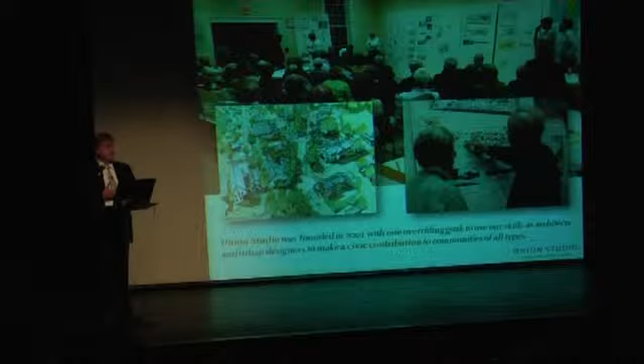Part of my frustration as an architect is that as communities, we've lost civic engagement, and I believe that architecture and the places we make are the venue for the civic engagement. So to the extent that we're able to come into communities and design places that put a premium on the community building aspects of the public spaces you build, that's the kind of project we're interested in.

And Newburyport's Waterfront, one of the things that's so remarkable is how committed everybody has been. I mean, it's been 40 years of vigorous debate on what's going to happen with the waterfront. And that suggests to me that people care deeply on both sides. And that's the kind of environment that we enter at our peril.

And I've said this before, it's a sort of terrifying thing to sit in front of this group, because I know you are not casual observers who just didn't have anything else to do on Saturday morning. You care deeply one way or the other, and into the breach I step.

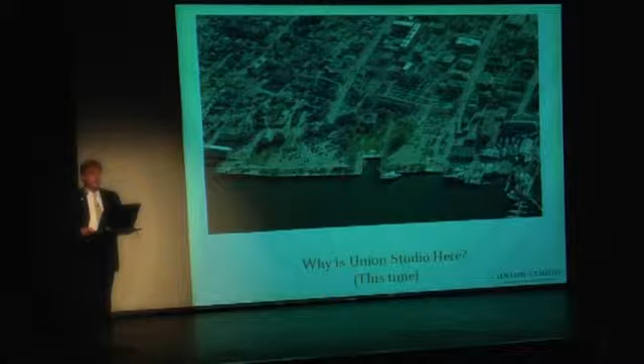So why are we here, and why are we here again this time? We're here because the conversation has evolved. A lot of the conversation that happened a year ago and then 9 months ago still is valid, but this time there has been additional information which is brought into the conversation, and we, in good faith, are trying to incorporate that. Many of the comments that have been brought forth have been valid, and the revised plan, I think, reflects a good faith attempt to incorporate that.

But I want to go back through the original goals. We were here to explore the possibilities of enhancing the city's waterfront, of making the park a better place. And we continue to be here to do that. But it was also our charge to explore the possibilities of connecting that park more fully to the city to create a better use of the park and the waterfront for all the citizens of Newburyport.

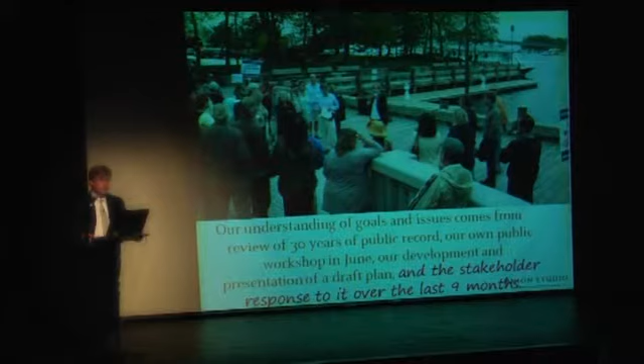Our understandings of the goals and issues have come from our review of the 30 years of public record, which I just reviewed again last night, the whole chronology, all of the arguments for and against a developed waterfront. Our own public workshop in June, where we presented some of our initial thinking, and then we walked down to the waterfront and heard more directly and emotionally the issues that people are concerned of.

Our really intense thinking and the development plan that we presented in September, and the stakeholder response to that's come to us over the last 9 months, which has been considerable, both in terms of letters to the editor, to the Daily News, communications that have been relayed to us. Several individuals who may be in the audience have forwarded information to us that we were not privy to before, so all of that's been incorporated.

The goals that we work under remain the same. Enlarge the park, the civic space, while preserving an appropriate amount of improved parking. And this is important, the improved parking. Right now the parking is ad hoc on a gravel lot, and even the experience of parking is something that should be improved. It's not just a matter of the number of parking spaces, it's the matter of the configuration of those, and whether the experience of parking at the waterfront also adds to the experience of experiencing the park.

We want to improve and enrich the experience of the park without commercializing it. We heard that loud and clear. Even the folks that support development on the waterfront of some sort are not in favor of commercializing it to the extent, and I'll show examples of the sort of antithesis, or the example of commercializing the waterfront. And it's been clear to us from the beginning that nobody wants to lose the bucolic or the park-like setting at the waterfront.

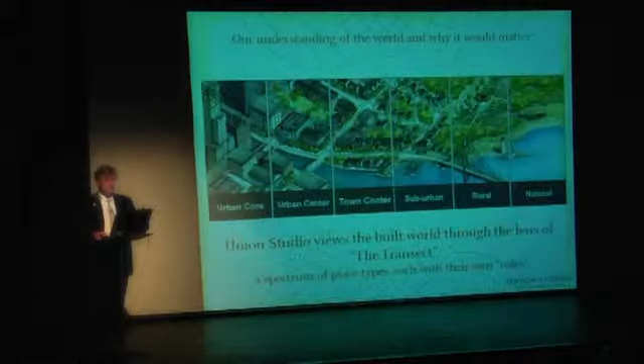That issue of self-funding and sustainable has been a subject of debate. I know that folks have questioned the assumptions of how much it will cost. We have more information about that now, which we can share later in detail. But the point in any scenario, whether you quibble over the exact number, is that the thing needs to be sustainable in several different categories, one of which is financial.

So in the original presentation, I talked about Union Studio's understanding of the world from the eyes of an architect and an urban designer, and I want to walk through that again. We understand the world to be kind of organized. This is an artificial spectrum, but it says that the world is organized as a series of place types, from the most natural to the most urban.

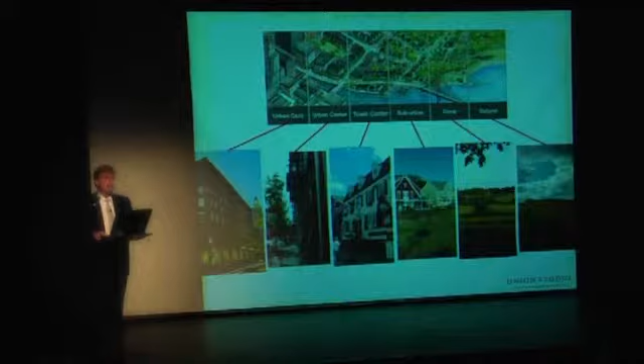And if you look at the world through that lens, you can start to understand what things should be in certain components. So Newburyport in particular, you see we've listed the natural, the rural, the suburban, the town center, and the urban core, and think of that from being the dunes on Cape Cod all the way to the center of New York City. And it's not just regional like that; any given town itself has this spectrum of place types.

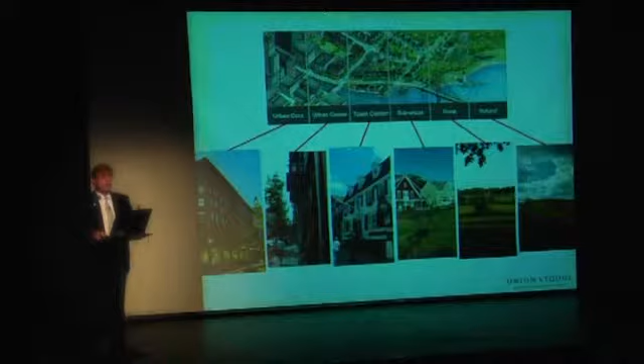Newburyport's downtown is what I call the town center, and I want to take a minute to make a digression which I made before, which is the town center kind of place is America's unique contribution to urbanism. It's that place where the built world and the natural world exist in a rare balance that doesn't happen almost anywhere else in the world. You've got a nice, loose fit of buildings which are in themselves objects standing alone with separations between one building and the other, knit through with parkland.

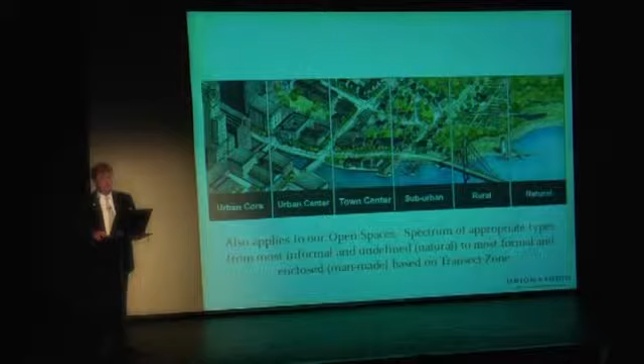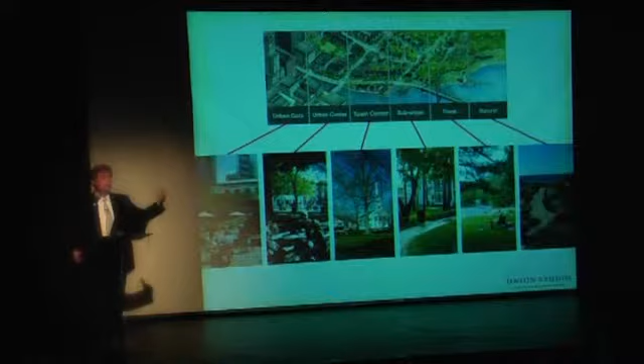The other way to look at it is from the landscape side of the view and think of it in terms of open spaces. And Newburyport also exists along a spectrum of open spaces. In this view, if you look at everything from the dunes on Cape Cod to Post Office Square in downtown Boston, you have this range of completely natural and untouched by human hands to completely artificial, but still an open space in the downtown of a city.

Well, Newburyport, again, occupies that middle ground, that perfect balance that we all understand as small town America. It's the town green with the steeple and the courthouse fronting on it. It's a loose collection, enough to create a strong place where you know you're in the middle of town, but it also is leavened and made softer by the green spaces that are around it.

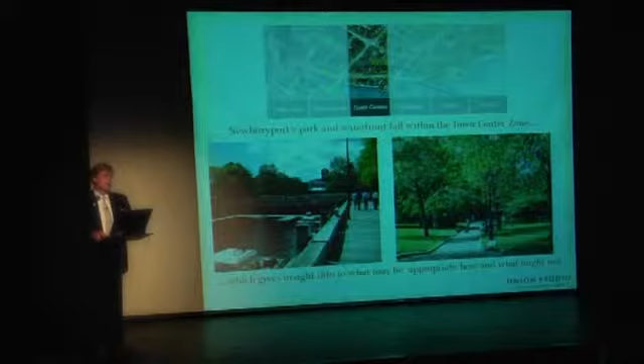So the reason I emphasize that view is because if you understand the world architecturally and from a placemaking lens, it gives you a way to judge what any given place should be if you're thinking about changing it or making it fresh. And so it's always been insight for us on what the appropriate nature or balance between the building and the landscape is in Newburyport, particularly at Market Landing Park.

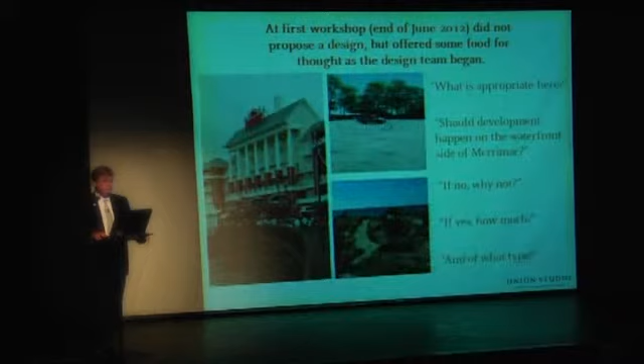So by that, we know automatically, if we understand the place we're working in, that we're not talking about the image on the left. Nobody in Newburyport ever wanted to commercialize the waterfront in a sort of honky-tonk way like the Disney Boardwalk or Atlantic City. But likewise, I ask you, is it appropriate that the waterfront, the key asset, remain a gravel parking lot in large measure?

It's not that, nor is it a series of dunes. It's something in between. So the questions we were asking ourselves is, what is appropriate here? Should development happen at all on the waterfront side of Merrimac? If no, why not? If yes, how much and of what type?

So we went back and looked at what the historical record of the waterfront in Newburyport was, and I know this is all old news to many of you, especially because you've sat through this presentation once before. But it's helpful to understand that it was not always open space. It wasn't anything like open space. But this vibrant waterfront, which was a mix of commercial and restaurant and tavern uses,

at the end of the 19th century and into the 20th century had become by 1960 this, a waterfront which still had some commercial activity, but it had largely become blighted, it had been cut off. All of the things that we're arguing for now, which is an attachment, a connection to the waterfront, had been lost. And the waterfront was cut off, it was ugly, and it was not even economically prosperous.

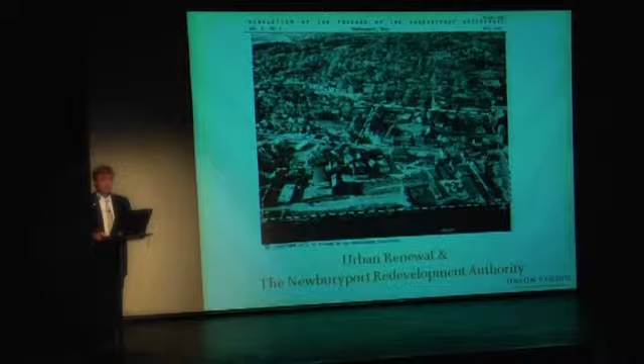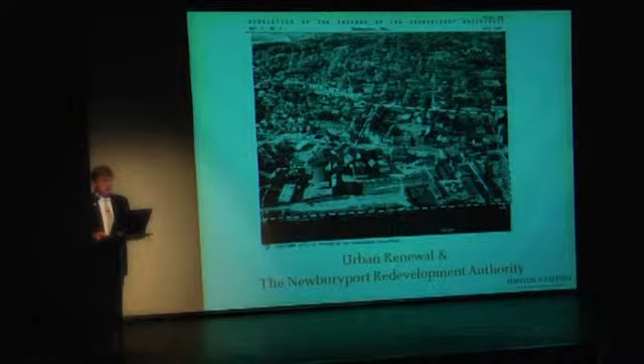So in comes urban renewal, which in my circles gets a bad rap. It's not responsible for a lot of great changes to cities, but in this case, what it did was create a blank slate. So urban renewal in 1968 took a waterfront which was populated roughly at this level and cleared it out to a waterfront which is populated mostly at this level. And what has replaced it is largely parking lots and Market Landing Park, which was built in 1984, I believe is the date that park was designed.

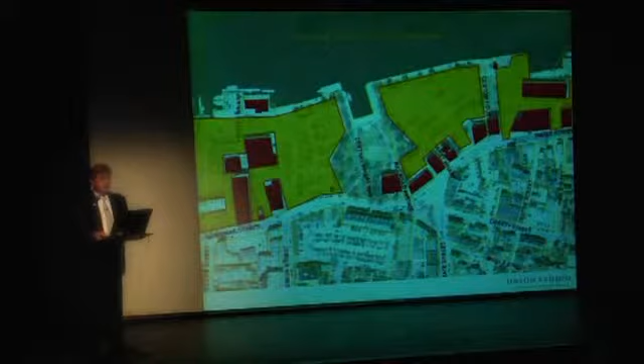I'm going to do an analysis of Market Landing Park and why this is such a special place, why I believe it works as a space right now, and suggest ways that could be made better. But because of urban renewal, Newburyport's use of the waterfront is much different from the prevailing patterns of New England waterfronts to the north and south of us.

Typically, you find in waterfronts that segued from a heavily commercial activity to a present day, this mix of residential and entertainment and restaurant uses that infills along with marinas and some light industry. This is not to suggest that this is what the waterfront at Newburyport should be, only to say that you have a rare opportunity, which you all know. That's what we've been focused on for the last 40 years. So this is the typical pattern.

I'm not even quite sure where all these images are, but this attitude of getting economic activity, primarily from a recreational point of view, out to the water's edge has been the effort of most cities that are trying to capitalize on their waterfront. They recognize the economic value of that waterfront, and since it's already developed, they're converting that development into a different sort, which is primarily recreational.

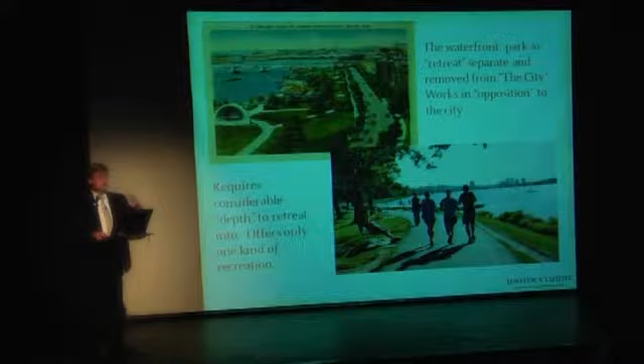The other way, which happens more as an exception to the rule than the rule, is the viewing of the waterfront as something different altogether from the city itself. And I would dare say this is how the folks from the Citizens for Open Waterfront prefer to think of Newburyport's waterfront, as a retreat, separate from the city and a place of repose or escape from the city. The image on the upper left is the Esplanade off of Storrow Drive. The Charles River's to the left, Storrow Drive is to the right.

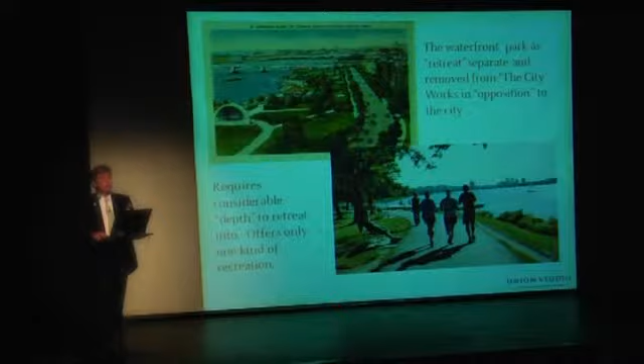The problem in this scenario is that attitude with respect to the waterfront requires more space, physical depth, than we have present at the moment. And actually Storrow Drive in this case is acting as the barrier, which makes it, once you get over into the Esplanade, you're in another world. It's about the waterfront, it's about moving along the edge, you've got a screen of trees, and the city has been left behind. But it requires considerable depth and considerable length for that to happen.

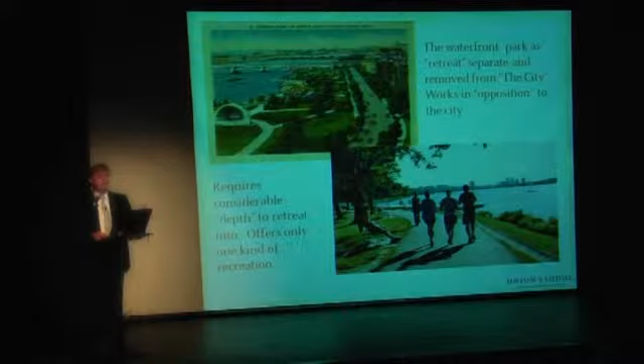An inversion of that would be like Central Park in New York City, where it's so big that you can lose yourself in it and forget about the city altogether. That's another way of thinking of open space, and it's the way we typically, as Americans, tend to think about open space. It is something completely other.

There's development over here, and there's open space over there. But that has not been the historical pattern for most of America's urban design. It's always been kind of a balance, more of the town green sort of open space than the Central Park sort of open space. So for Newburyport, this is both a unique opportunity and a challenge to provide a place of retreat, but also a connection to the city.

So the way the park is currently working is, to us as sort of wonky architects and urban designers, very interesting. We sort of analyzed it to understand what was the best way you would intervene to make more of the good stuff and take away the bad stuff. It acts as both a meander in terms of the water's edge and a gathering place, but it doesn't do any of those as well as it possibly could.

Obviously, I said before in the first presentation, well, there are problems with Market Landing Park, and people just jumped on me and said, there is nothing. We love this park. So obviously, I retract that, and I concede that everybody loves Market Landing Park and the boardwalk out at the water's edge. But there are opportunities, I believe, as an urban designer, as someone who's honestly trying to balance all the concerns of your community, there are opportunities to make it more of the stuff you enjoy.

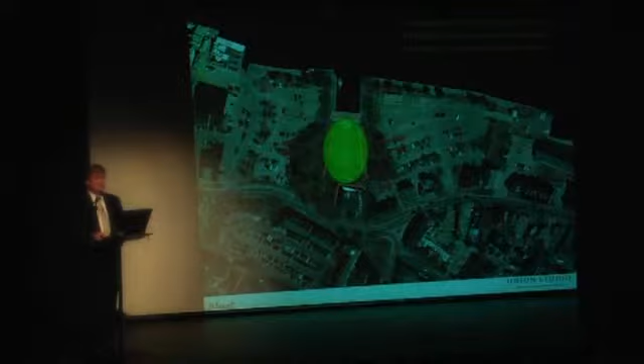When you sit in the middle of Market Landing Park, you feel like you are removed from the hustle and bustle, from the traffic. It's a great place to have a picnic. But it's working in spite of things that landscape architects and architects would consider its lack of closure, to use jargon. So that central focalized gathering space, its landscape buffer is diffuse and it's too thin to really enclose the space.

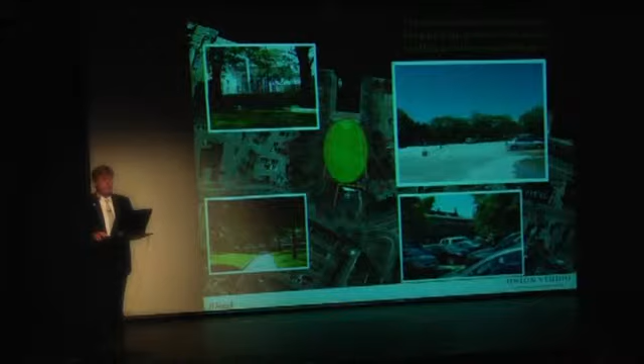So the experience at the edges, if you're doing anything other than looking out at the boat basin, you're looking left or right, you're looking through the trees at parking or at the backs of buildings, and so you have this view of the parking right here, another view of the parking to the east, and especially in the winter when the leaves are off the trees, that view is even stronger.

But it's also working as a centralized gathering space. All of the lines, the architectural lines, the enclosure of the tree lines, the stage itself provides a setting where this is where you go if you're going to have wedding photos taken or if you're going to have a small concert on the waterfront. Everybody wants to be in this space. So is there anything you could do to make it work better, or should you just leave it alone, don't touch it? But the way it works currently suggests how it might be improved.

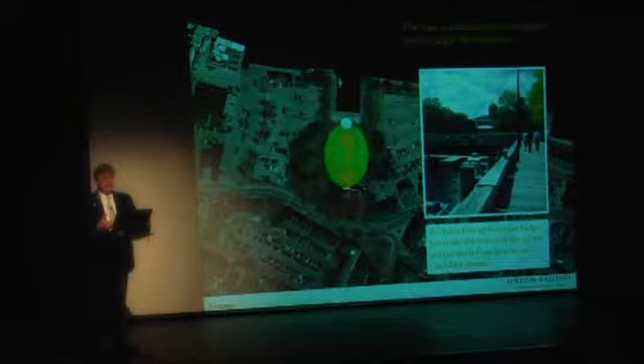And I said last time that the one building that does have a presence on Market Landing Park is this building that we're in right now, and its cafe, which fronts on the water. This image on the right suggests what I mean there, in that the tower and the porch of the Firehouse Cafe tends to create a closure that lets you know as you've entered Market Landing Park that you've entered a space. And having the two bookends of the stage and the cafe help to create this sense.

It's certainly not diminishing the experience of Market Landing Park, and we would argue that it's the one instance where you have this in-between, or this hinge between the architecture and the landscape, which actually, to all reports, I haven't heard anyone say that is not a successful arrangement.

The edge space, the circulation in the boardwalk, has another character altogether. And you can see that people love this. When you walk out into Market Landing Park, you're going to move out to the water's edge, you're going to move along it. It's interesting, however, that you're not always moving along the edge.

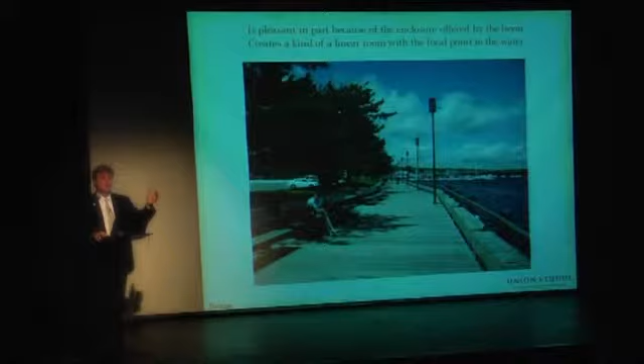People like to sit at the edge, and part of the reason they want to sit at the edge there is because of the closure that the trees at the background and the berm create. And that helps to create this sort of room. It's an outdoor room is another piece of jargon that architects use, but there's the focal point of the water,

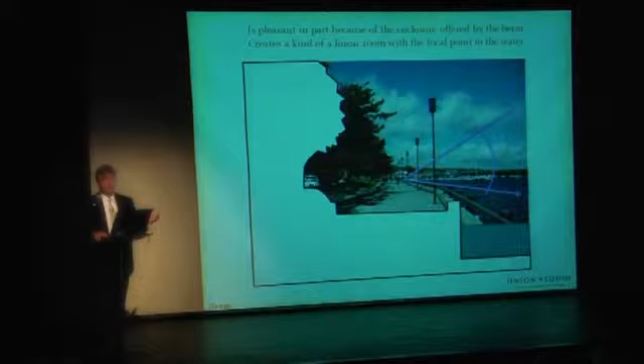there's a green backdrop behind you that's sort of enclosing you, and you've got the grade change of the berm itself where those benches nestle up to it, and it feels like a place because it's enclosed on one side and it's got an open prospect on the other. You can see how busy this is and how folks go out of their way to occupy a spot on that edge.

You can see the woman sitting on the chair up on that green space right there, but if you step back, you see that just behind that berm is the experience of the parking. And that's something, although it's working right now, there's no need for it to be that tenuous. You could have more green space.

So this experience right here, when you step back a little bit, you can see how present the parking is to the experience of that park, particularly at the point where you want the most green space, which is right as you round the corner from the boat basin to the boardwalk. Right, the only thing that's being held there is a couple of trees and a narrow, probably 15 or 20-foot space of green space on which people perch at their peril just to get some green space close to the water.

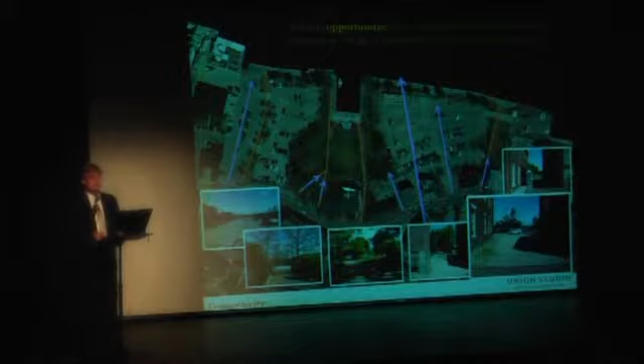Right now, there are several opportunities for visual and pedestrian connections, but most are weak or incomplete. So you've got this kind of connection or way to the water, which is the view. Obviously, you see the water, but there is landscape at the edge, which is obscuring that somewhat. We have other views that go through buildings that are fully obscured by landscape, so the view to the water is not exactly as direct as it might be.

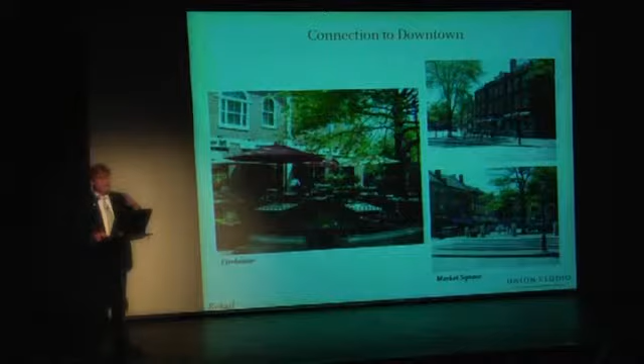And there are very few mixes of uses, as I said. The only real mix of use or additional use besides passive recreation on the waterfront is that one buffer area between the cafe and the park itself. And this, by all reports, is successful. So it has connections to downtown, but it happens on the backside of the buildings, and in this building, it serves as the only real gateway from Merrimac and Water Street to the park side.

I want to lay in one more level of consideration. That's the physical and regulatory framework under which we've been working. This is incredibly complex, and this itself, even if you didn't take into account any of the other concerns of the community of Newburyport, is going to make any intervention on the waterfront be very specific and very minor.

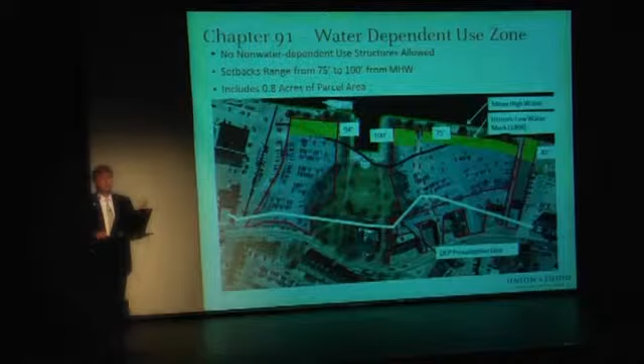I'm not going to walk you through every detail of this slide, but this is several of the overlaying constraints. You've got Chapter 91, you've got mean historic high tide water, you've got setbacks that happen as a course of zoning, you have restrictions on non-water dependent uses. All of these things add up to create, in any scenario, a possible development footprint which is pretty limited.

So again, we said what we want to do is balance this green character to this space with some activity or some additional resource. It's not an either or, it's an add in to. And that's one of the things, a little digression that I wanted to make, which is in a lot of the discussion that's happened publicly, there's been what I believe is a sort of false dichotomy. It's between either the proponents of an open waterfront or the proponents of a developed waterfront. And that ignores all of the nuance, which I hope will come through in this presentation. Those two things can coexist so long as they are not described absolutely in both cases.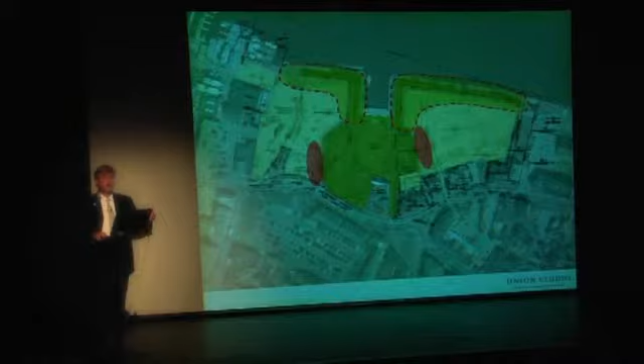So how do we get more of Main Street, which comes into the park itself? How do we get more of the experience of Firehouse Cafe in a way that doesn't disrupt the green nature of the space? In our original study, we identified these two areas as places where if buildings were located in that general area, we thought that they would not impinge too greatly on views to the water, and they could bracket a park, which the landscape architect who was present at one of the meetings acknowledged: when they designed that park, they always imagined that it would have a closure on the east and west.

So we want to maintain the access to the views and to the waterfront, and we want to increase its relevance all during the year. Right now, despite some hardy souls who go down there in the winter and some hardy souls who go down there at night, most people would acknowledge that it's underused during the winter and in the evening hours. But a small amount of program could change that completely.

Just one cafe that's open until 9 o'clock at night somewhere in the vicinity of that park could activate and provide critically this thing that planners like to call eyes on the street or eyes on the park, which, having that establishment, makes it safe for everybody else to be there, where having no eyes on the park and no kind of official activity leaves it to descend to its lowest common denominator and make it difficult for people to feel safe there.

And we want to find a way forward which is sustainable. And sustainable, as I said before, is usually talked about as environmental or social. We're talking about fiscal sustainability here. And as I said before, there have been debates about how much it would cost to improve the park. I've heard estimates from as little as $1 million to improve the park. Our conservative estimates, and we have this being run through a professional cost estimator right now, suggest that the improvements that we are proposing are going to cost anywhere between $3.5 and $5 million. So whether you debate the actual amount, and maybe we're off by 30%, it doesn't matter. There is a significant cost there that's going to need to be addressed.

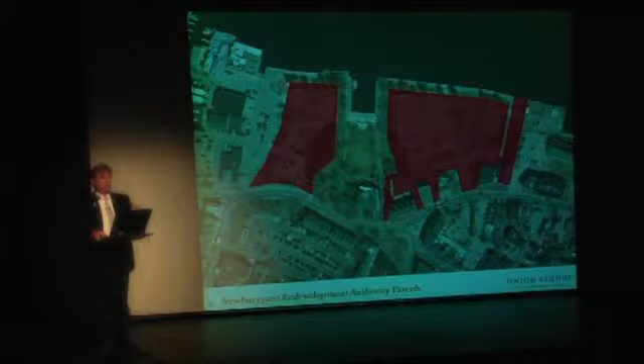So in the last part of this presentation, we've said, okay, it doesn't matter whether or not the NRA has legal standing to that part of the land, we're going to give it back because we are committed to not decreasing the park space. So you've got this much developable area. This is what we presented the last time. If you take away from that the existing circulation routes that you need to access both the Fisherman's Pier at the end and the existing businesses along Water Street, you lose that much developable area.

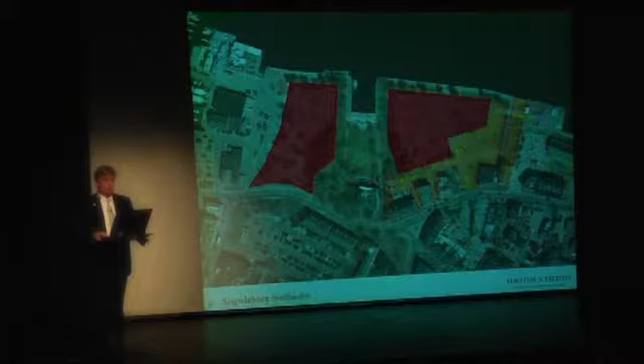If you take away the mandatory setback from the waterfront, from the mean historic high tide, you lose that amount of developable area. If you take away another layer, which I would call our voluntary setback, and that's the area where, just as designers, we recognize the purpose of this space is to get people to the water's edge. So putting a building on the water's edge, while it might satisfy the people who own or occupy that building, takes away a civic good, which we wouldn't want to do. So we said, in any case, we're not going any closer than this blue line. So all of that area is gone for development.

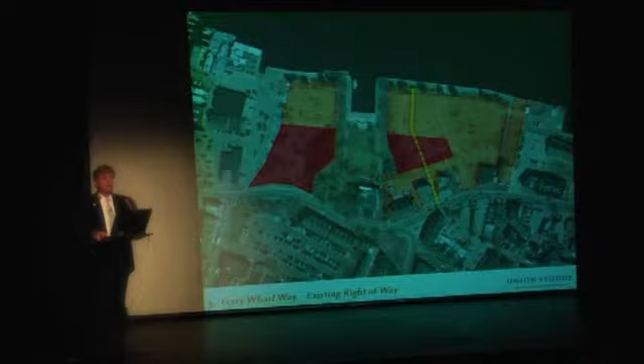Then we start layering in the ways to the water. I believe it was the court cases in the 70s that established the primacy and the enforcement of the historic ways to the water. And those have some flexibility in that, the way the law is written, the ways have to be preserved. They can be modified a few degrees left and right of where they currently are located if that improves the condition, but the spirit of the law is that those ways to the water must be maintained. So we maintain those, and when we take this one right through, it cuts off that part of the developable area.

There is another way to the water which already exists as parkland, coming down at the bottom of Green Street, and we're going to take that away because we're not going to touch anything in that area. That work has already been done. Now we have the view corridors. As you move along Water Street and onto Merrimack Street, you have view corridors that exist. And it's our stated intention that we're not going to minimize the current visual access to the waterfront. We're only going to improve it. Everything about this is improving the experience of the waterfront, not compromising and making something worse.

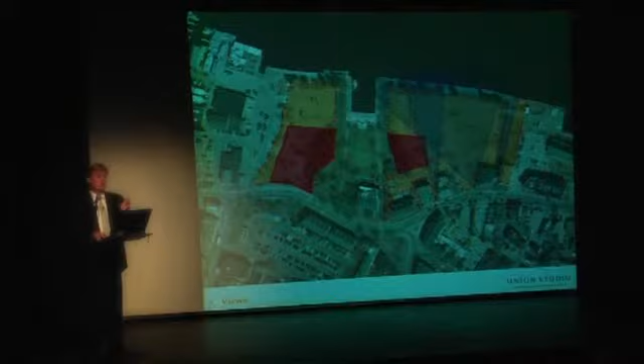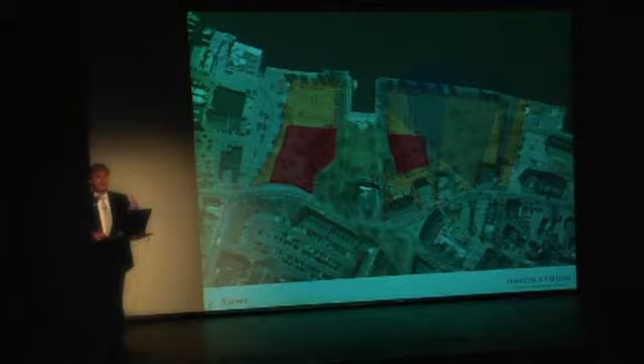So if you layer in all of those view corridors. This last one that I just laid in, I'll do it again. Currently, in our original scheme, that one ended in a mature grove of trees. So we were contending that that view corridor doesn't exist now, and we were going to let the building be apparent from that viewpoint so that people knew there was development in the waterfront. We've since amended that, and I'll show you that in a minute.

But as I go through the site and layer in all of these view corridors that are really constrained by existing angles and views as you stand out there on the waterfront edge, and you take away the resulting development area, you're now at two small areas that have satisfied the criteria of maintaining the ways to the water and the view corridors that exist. We layer into that some of the considerations I talked about, framing this space and creating an enclosure, and that any good outdoor space, whether that enclosure is made by landscape or by structure, feels better when it has limits to it, or bookends, or if you want, the walls of the outdoor room.

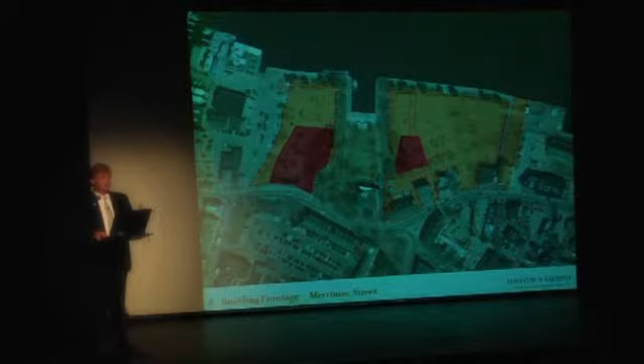We also noticed that on Merrimack Street, there's currently a tooth missing in the street frontage. As you move along Water Street across by the Firehouse Cafe to the parking lot there, you see all of a sudden the edge of the waterfront, the edge of the street is lost, and that benefit of having a strong commercial corridor could be made better by holding the street edge at that point.

And then finally, when you connect those two, you get a chance to create a frontage as you move along the sidewalk that both deflects to address Merrimack Street, curves in to create the entrance to the park, and then finally brackets the experience of Market Landing altogether.

One of the things we noticed, or we made the observation, that the buildings themselves in this configuration were larger in terms of real footprint, but that we were going to make them up of 3 blocks connected by a lower thing so that the scale felt similar to the existing architecture. We've since retreated from that, and I'll show you what that results in a little bit later.

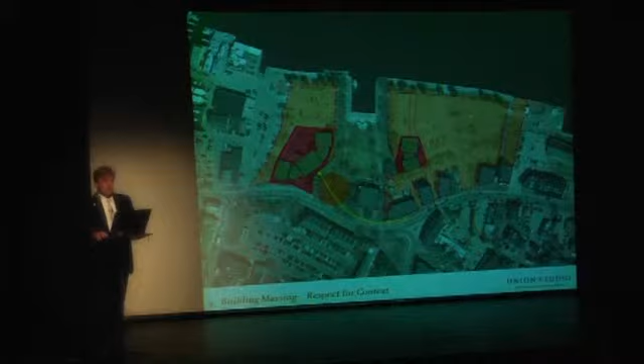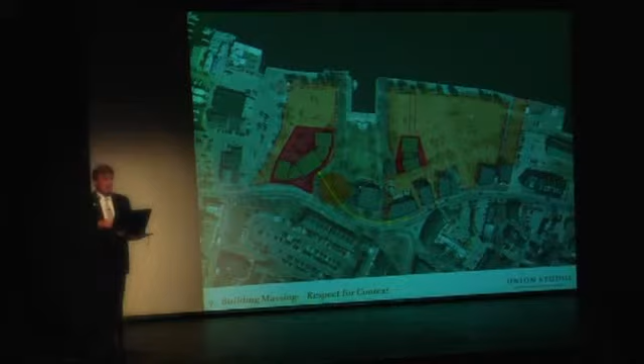It also provides a sense of arrival as you move down the sidewalk through here. All of a sudden you were fronting a building that brought you into that space right there, and then set up the entrance into the park. So it's sort of an esoteric design element, but it's not so esoteric.

We noticed that whoever located the existing convenience facilities that are located right here and here did so intuitively in a way that reinforces that notion that that's the entrance to the park. That's something a little bit different than this part, and so it should be framed. They located this perpendicular to Merrimack Street, and they located this to front into the park.

So I'm not stating this as a scientific proof that our design genius is somehow confirmed. I'm just saying that two people who are thinking about the problem from totally different realms arrived at the same observation that that was a good place to put buildings.

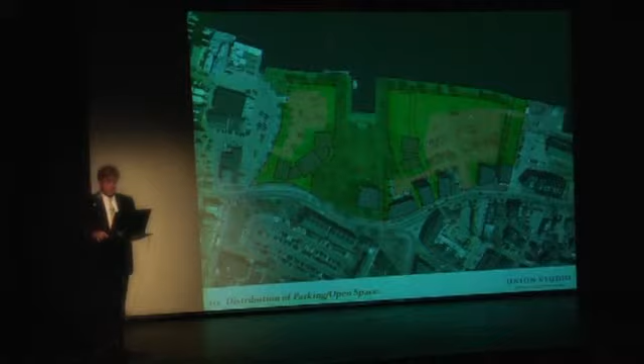So the green space as it exists now was enlarged in our last proposal by this amount right here. Not all of it is absolutely green. Some of it is made up in pathways. But the thickness of that zone right there and the thickness of this zone right here creates an area that now you can occupy. You can see the remnants of parking, and these were job trailers or something that were parked out there. That's where it was before, and this is where it is now. And the amount of green space that was being added is apparent. That was our scheme in September.

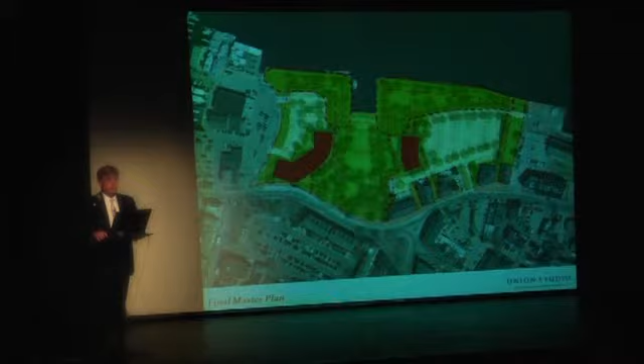Those two buildings in that much green space. And it corresponded very closely to our initial observations that given the inefficiency of the way the parking was going right now, this was an opportunity for additional green space, that we were going to thicken up this edge, and that we were going to locate buildings here and here, and that corresponded to our original presentation in June of last year.

So the open space connections that we wanted to point out are that in this case, the original scheme, we had buffers from the original Market Landing space to the proposed buildings. We were maintaining those. And we were presenting a scheme that took an existing 3.7 acres and proposed 4.8 acres.

The main difference being that while we lost an area in the original scheme that we believed was actually within the NRA's purview because of the property lines as they're defined, we were trading that for space over here and here, and the net result was 1.1 acres of additional green space. And I'll show you how that's different later. As I said, this area was a loss, a net loss, and this was the net gain.

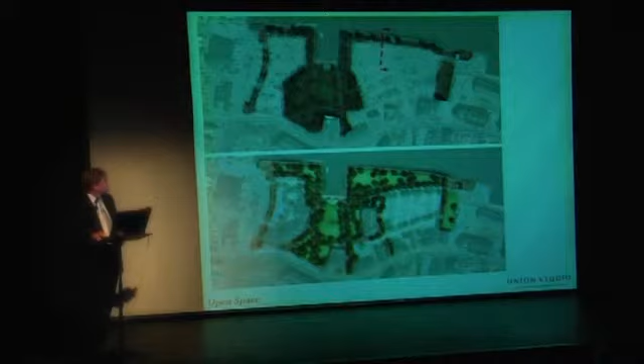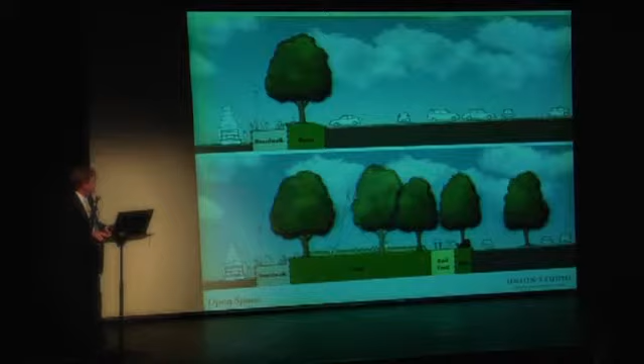But if you look at a section through the new enlarged space, you can see that just by the very nature of the depth of it, we're maintaining the berm height, but we're extending it out another 80 feet or so on average. It's a tapering space, so it's narrower in some and wider in others. This is about at the middle. But you can see the net experience at the waterfront is much greater.

Add to that the fact that we are incorporating the long sought for bike connection that would bring you through the site and back out here, with hopes that eventually it will connect on the west and east. And then you add in all of the enhanced ways to the water; we have more ways to the water here and here. That's been enhanced. This way has been enhanced by its location along a building.

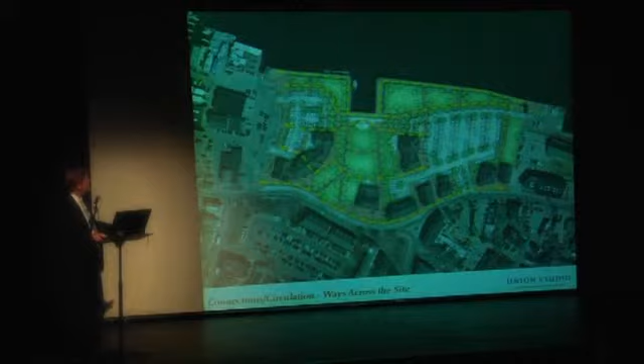And then you talk about the ways that we had moving across the site, and the net result was that, as part of our original goal, which was to enhance connections to the waterfront, from the waterfront and within the waterfront, this scheme did that.

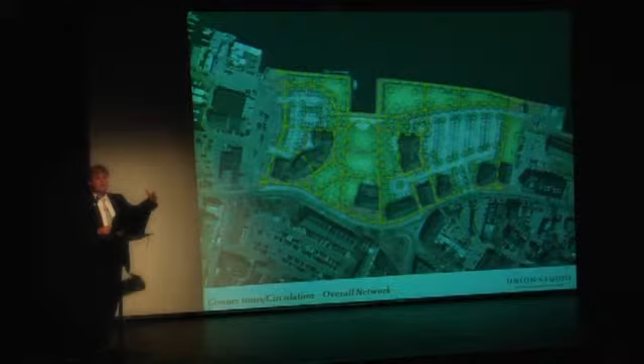And I just want to state again, because you may be saying to yourself, why are you showing this old scheme? We saw it a year ago. Because all of the thinking that went into this is still valid. And that's why I insisted on going through this again, because otherwise the logic of the revised scheme doesn't make any sense if you don't know that it's the same logic that generated the first scheme.

So the proposed master plan is just that, a master plan. It's not the architecture. So we want to give you some idea of what the architecture would be, and we don't need to labor on this because you see it all around you. All we were doing was proposing that anything that gets built on the waterfront needs to respect the patterns, the traditions, and the materials of what you find in Newburyport all around you. So we thought it would be helpful just to reiterate what those patterns and traditions are.

And typically, all through downtown Newburyport, you see a first layer of retail, which typically has a higher scale. It's maybe 16 feet with a sign band and awnings and larger windows. They happen all over. And then above that are 2 stories, which were originally probably office or mercantile, and many of them have been converted to condominium units.

I just got a statistic this morning that right in this area of Merrimack and Water and the downtown area, there are at least 100 condominium units within 150 or 200 yards of this area, and if you expand the net a little wider, it gets up to 120 or so. I can go through the specifics of that if anyone wants to know.

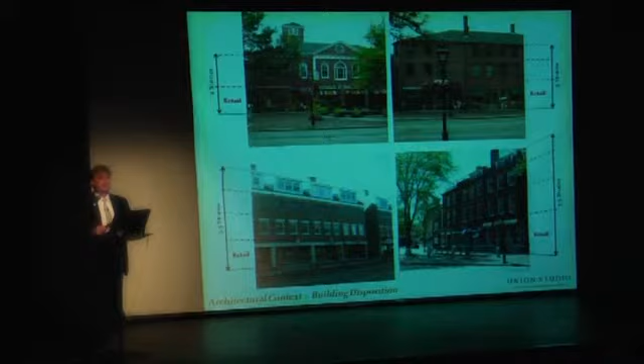But that's just to point out that currently people are living downtown, and in the mind of an urban designer, that's a good thing. You want people living downtown. It's what activates all of the public spaces, provides those critical eyes on the public realm that make sure that the people that are there are the people that should be there. So our proposal just repeated that same pattern.

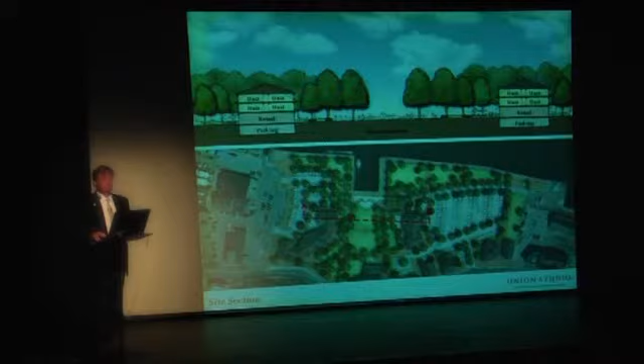So you can see we had 1 layer of retail fronting on Market Landing Park, and then above that we had 2 layers of residential space that was happening within a roof line that was implying just 2 stories. So there's 2 stories below the eave line, and then the 3rd story is within the roof line as if it were dormers or any of the other ways. So the feel of the building would be, we call it 2.5 stories. It's 2 stories plus space in the roof.

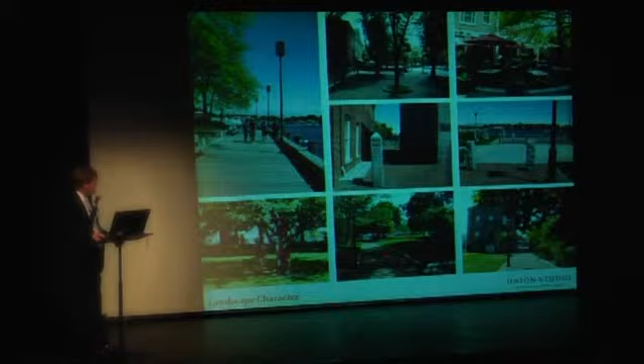It would be very akin to this, and the forms that we'll show a little bit later are coming right from this language of stuff. Likewise, the landscape architecture is the same pattern. You've got a nice tradition of these granite piers marking the ways to the water, brick pathways, wooden boardwalks, brick with granite edging, and a loose, in the world of landscape architecture, they would call it sort of romantic landscape as opposed to a formal landscape. It's formal in places with hedges, but generally we would continue with that same pattern of material and approach to the landscape. Oh, sorry, wrong way.

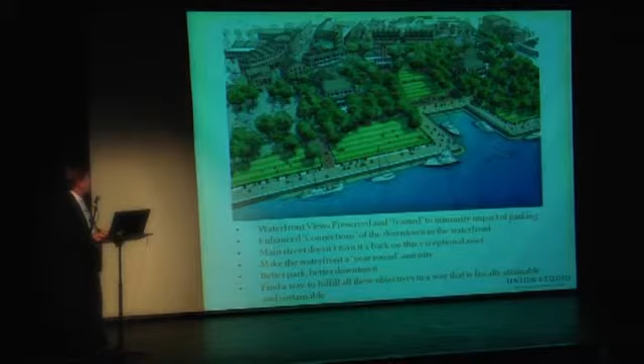So what this did, these were the goals that we set to do. We preserved and framed to minimize the impact of the parking. We enhanced the connections. Main Street no longer turned its back on the asset. We made the waterfront a year-round amenity, a better park, better downtown, and we found a way to fund all this through the development revenue of that. But folks had objections, and many of these were legitimate, so we brought that to bear.

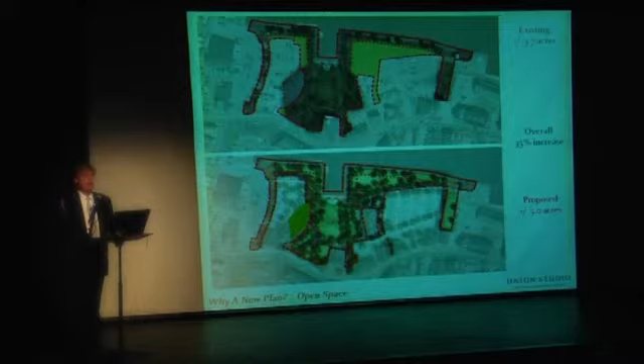In our new scheme, as I said once before, we took what had been a net increase of 30% green space and a total park area of 4.8 acres, and we gave back the space that was in question. So again, I said legally I believe this is NRA property, but by custom and by public perception it is not. So that space came down into our new open space plan, and that took the net difference between them from 3.7 acres of existing waterfront with a 35% increase to 5.0 acres. That space is roughly 0.2 of an acre right there. The lines of that, by the way, it's been surveyed in different locations. Instead of a survey line, we went off of the aerial where the green space actually was and tried to preserve that.

So that space right there, and also we decided that the building that we had located along this edge was too close. Although it was staying outside of the parkland itself, it required some buffer that we weren't giving it. And so we attempted to move it out of that location. So you can see how when you lay over the new consideration with our old plan, you can see where that building sits within the green space that was currently being occupied, and this building was intruding on what we considered to be an important buffer.

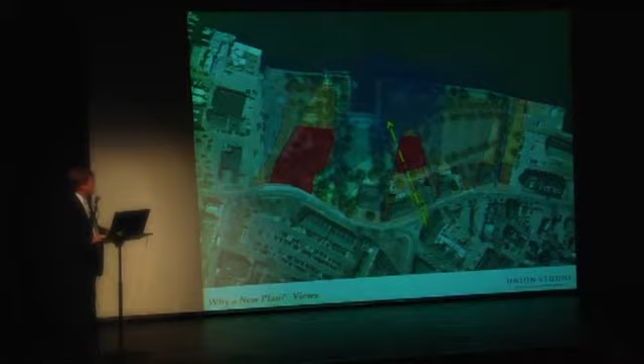Going back through the developable area diagram and taking out now this way to the water, which we felt like we were making an argument that didn't exist now, and so we could obscure that view. We now decided we're not going to try to do that. We've also been made aware of an additional view corridor from Unicorn Street that's been important to maintain. And further, we wanted to make sure, because there were concerns, that Green Street's view corridor would not be impinged. We don't believe it ever was in any of our schemes, but we want to make explicit that that view corridor, as you come down Green Street, would not be affected by anything we would be doing.

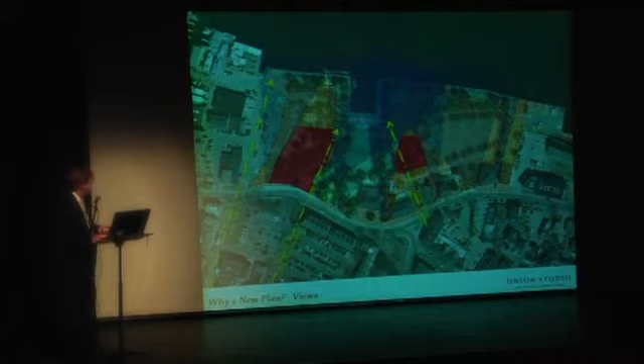So those buildings now, in this scheme right here, have sort of stepped back slightly. And a couple of other things have happened. One, before, although we were expressing these buildings as smaller volumes connected by what I call a hyphen, we actually realized that the kind of Baroque form of that with all the angles was not really something that you see too often in Newburyport. So one of the goals in taking this back out of there was to simplify the building into more rectangles like you find everywhere else downtown.

Separate this building literally so there's a way through it, which is like the other ways to the water here and here and here, and to make these three much simpler buildings that stayed completely out of all green space, existing or not. And then what that did as well is it frees up.

In the original scheme, we had this pinch point where the bike lane was coming through right here. And we were convincing ourselves, I believe, that that conflict wouldn't be too bad as bikes rode by cafes at the bottom of these things. In point of fact, that was a troublesome point right there and there. These buildings were a little too close. And the way from the west to the east was a little convoluted as you went through a covered passageway out to here and around.

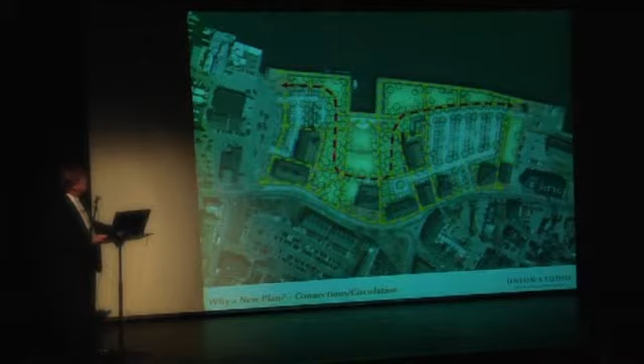In the new scheme, we've pulled the buildings back, created another buffer between this and Market Landing Park, and now the bike path can move through with a layer of landscape between it and any development. The architectural character is the same in terms of its inspiration. We're just going off what we find and we're replicating those forms.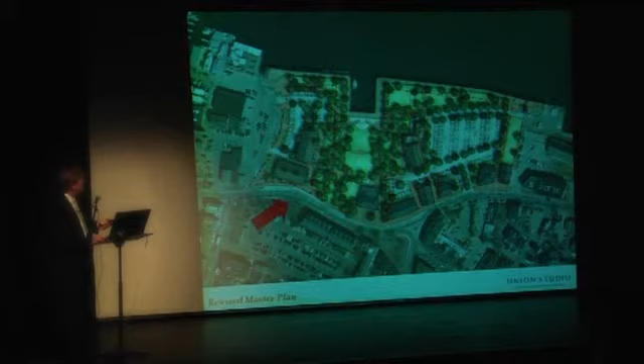A view from over Merrimack Street. This is what we originally proposed, and you can see right here the footprint of the angled shaped building with its cafes directing you in a path along to the water. And you see the original building right there, which was sort of mannered a little bit, but also sitting up on the edge right there.

And in this scheme, the building is now stepping back completely out of that, opening up to guarantee, or to make even more protected, the view corridor from Unicorn Street and from above the higher parts of the town, and to create even more buffer between the park itself and the building there.

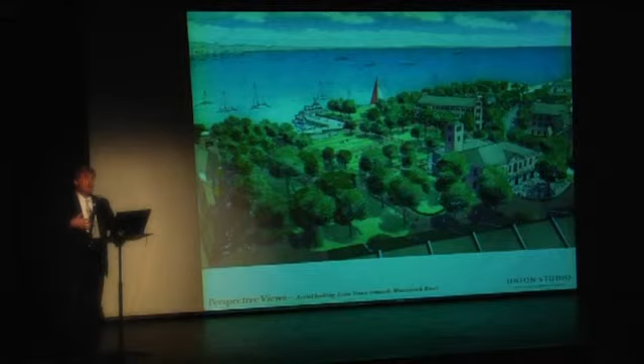We're suggesting all of this cafe life because in our view, if you're going to do this, what these buildings really want is that additional element to the park. Again, my contention is it's not taking anything away. In fact, it's giving more green space, but it's also adding at the edge of this an amenity that everyone's going to love, I believe.

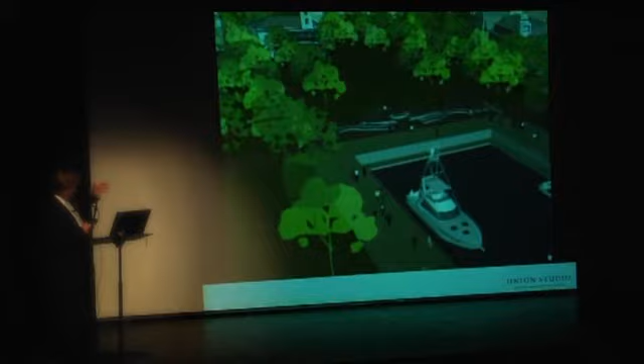There you can see in this rendition, we don't have the second-story porch. That's just a simple bar building with the elevator there. We were picking up on the tower of the firehouse and repeating that element to kind of help give this place a little character. And this, I apologize for the choppiness of this and the rough hewn, but it's an animated fly-through, walk-through of the space to help as best we could with the limited time and resources we had to communicate even more faithfully what the experience at the bottom of this park is.

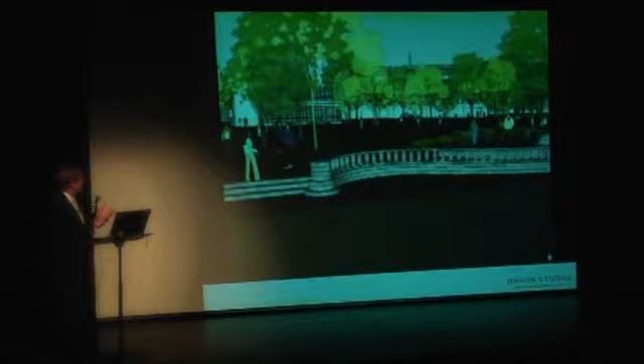In the back, you see the Firehouse Cafe. We're moving along in front of the stage to the west right now. This is one of the new buildings right here. It's rendered in white, coming up the steps, and then we're moving through the center of Marketplace Park back towards Merrimack Street. As we get to Merrimack Street, we'll turn towards our building and out onto Merrimack Street. Now you can see that's the face of our building fronting on Merrimack Street.

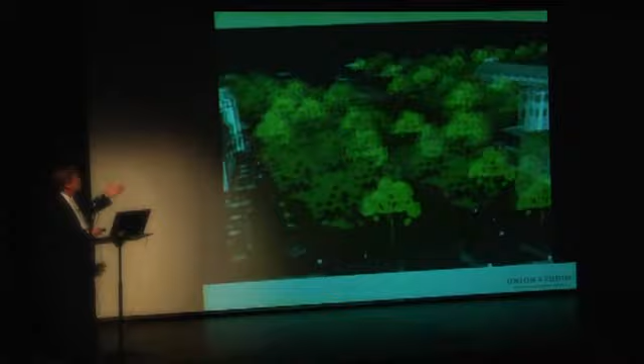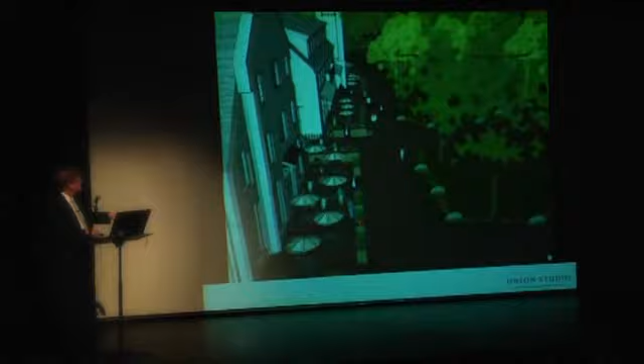We're rising up to get a sense of what the whole park feels like. There's our other new building over there. Now we're going to come back down and walk along the sidewalk here. You can see the cafes spilling out with the movable planter boxes and people occupying the edge. We're moving along towards the water, and then we're going to turn to our right and go back over towards the stage. Move across the stage and then over towards our new building.

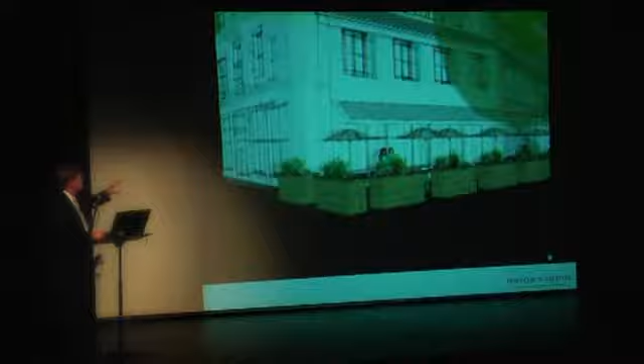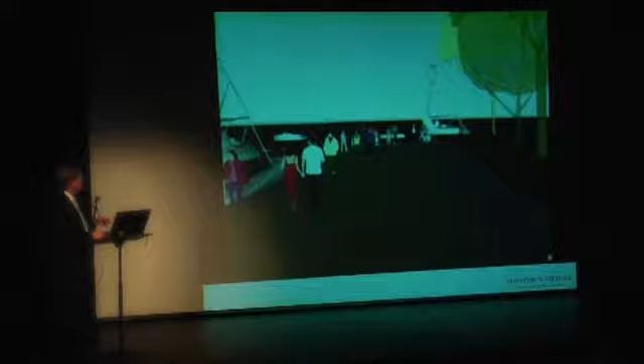You can see again the cafe life at the base, moving along that edge and turning around again to face the water. If anyone's getting seasick, I apologize, I am too. Now you're looking back at the boat basin, the boat slip. And turning around.

I'm going to need Dramamine right about now.

Again, you see the Firehouse Cafe back there. So that's a rough estimate of what it would be, but we did our best with the computer power that we have.

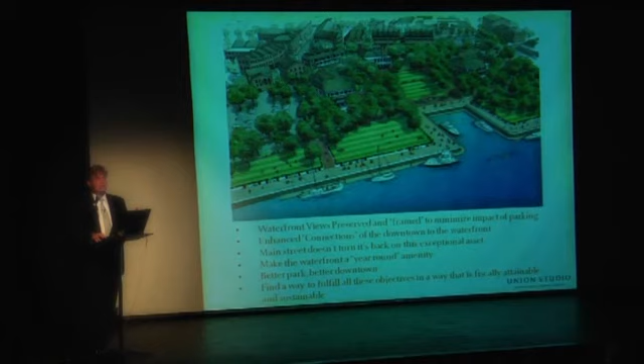So to recap, the original plan satisfied all these goals, we believe. We believe that the new plan, which I just tabbed to, also satisfies these goals. We don't think anything's changed in our logic between the reasoning that got us to this plan and the reasoning that got us to this plan. But in addition to the benefits that accrued to the first plan, we've also added these additional features. All development now better respects the existing green spaces. We thought it did before, it does so even better now, NRA owned or not.

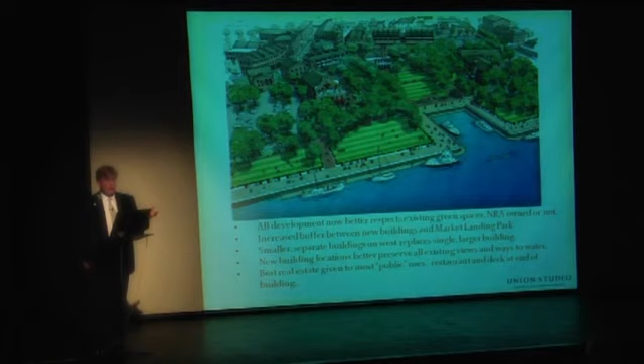There's an increased buffer space between the buildings and Market Landing Park. Smaller separate buildings on the west replace the single larger building, helping to break down the scale. The new building locations better preserve all existing views and ways to the water, and the best real estate is potentially given to the most public uses in the form of this upper level restaurant and deck, which I think would be the showpiece of Newburyport, and you'd have a lot of folks coming to experience that.

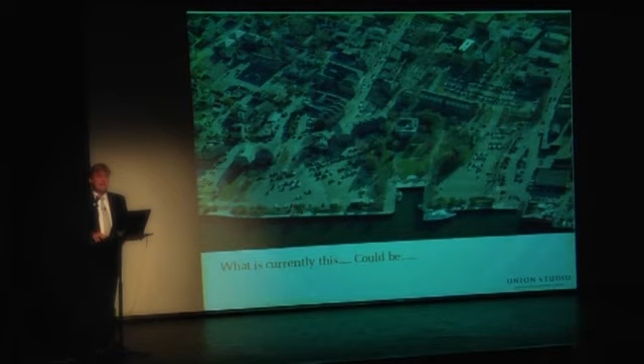So with that, I just want to suggest that you currently have this, and it's a great asset to the community. I just don't think it's the full benefit that you could have from your waterfront. And this image is the one that I'd like to leave you with as something to work towards. I have done my absolute best, and everybody in our office has done our best to really, really respect all of the fears and concerns about such a special place. And I so hope that the community goes in this direction, because I think I would love to come visit it.